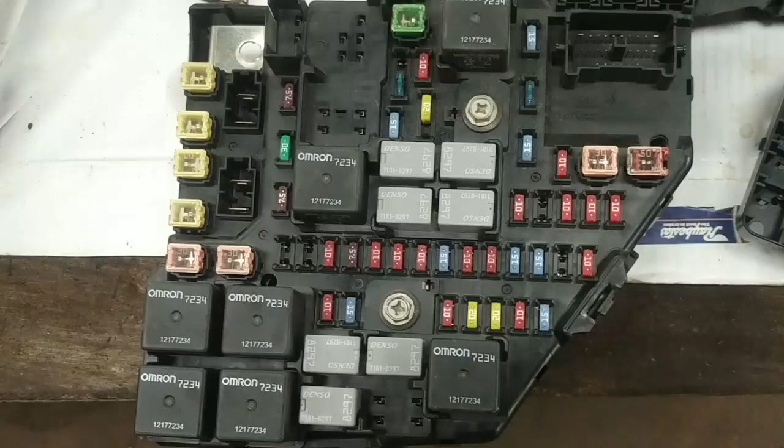So today we've got a previously enjoyed fuse panel out of another vehicle from the States. Looks excellent condition, no signs of corrosion. I've just gone through and compared the fuses on this one to all of the fuses in the original one to make sure they're all in the same place. The only one that was different was this 15 amp, and in this fuse panel, as it's supposed to be 15 amps, it was 10 amps in the other fuse panel for some reason. But everything's there, so we're going to install it in the car.

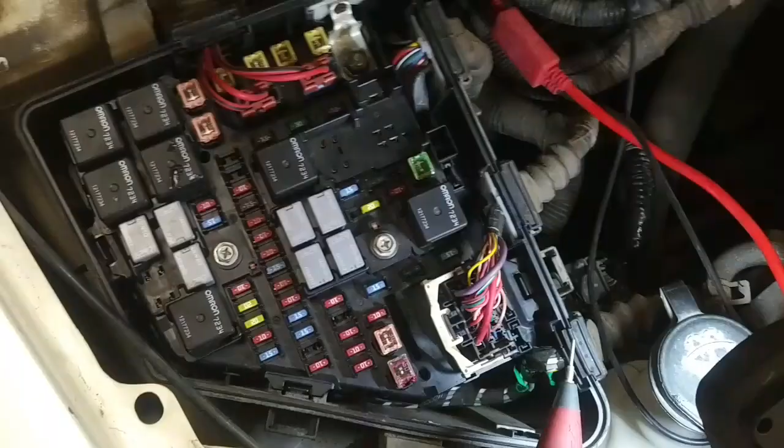Okay, so I got this used fuse panel installed, and everything is connected. I put dielectric grease on all the terminals and reconnected everything. We're still not out of the woods though. The vehicle will still not start. Yet now when I check this fuse that I was checking before, the one that I had a voltage drop on, I'm going to press the load pro button now. No more voltage drop.

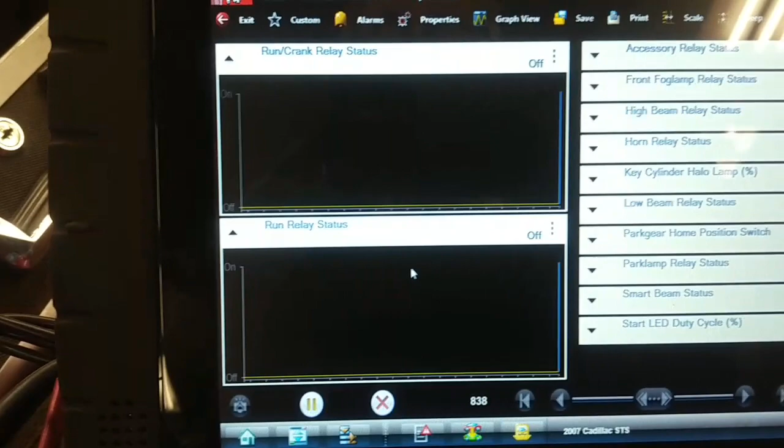So we've corrected part of it, but now the BCM is not turning on this run crank relay, and I'm not sure if it's turning on the ignition 1 relay, which is in the back. So I'm going to have to go back there and have another look at that. It says on the scan tool that it's not commanding it on, yet the ignition switch inputs, there's the run crank relay status off and run relay status off. I'm assuming the run relay is the one that's referred to as the ignition relay in the fuse box under the right rear of the back seat, but I'm not 100% certain on that. Yet if I look at data parameters related to the ignition switch, it seems to be functional. So we're going to do some more checks on that BCM again.

So I'm at the BCM and I just reconfirmed both powers on the red-white wires coming from those two fuses, and I did it with the load pro and loaded the circuits, and there's no voltage drop. Drops 0.1. And I checked the grounds again and they're good. So now I'm focusing on the ignition switch signal into this BCM, which is right here, pin 29, IPM ignition mode data. So I'm back pinning that one.

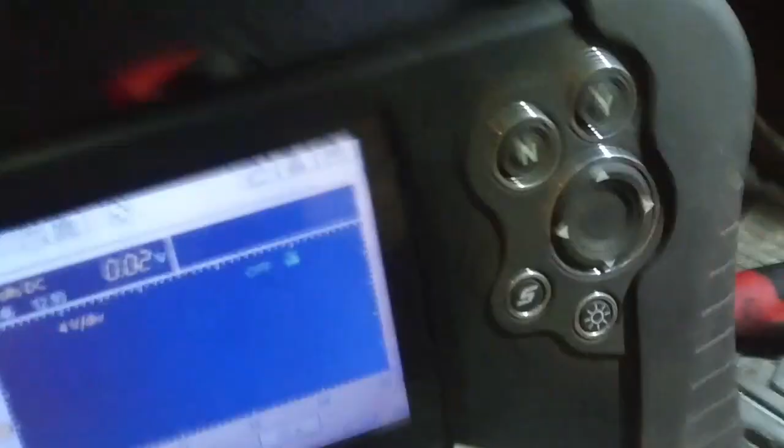It's a green wire with a white tracer, and at rest with the ignition switch in the flashing red mode, whatever that is, it reads 0.02 volts. Oh sorry, the meter shut off. I'm going to press the accessory button here and we'll see what it goes to. 8.93 volts, and the ignition accessories just turned on. Now I have a green start button, which I didn't have. I must have pressed that switch 50 times.

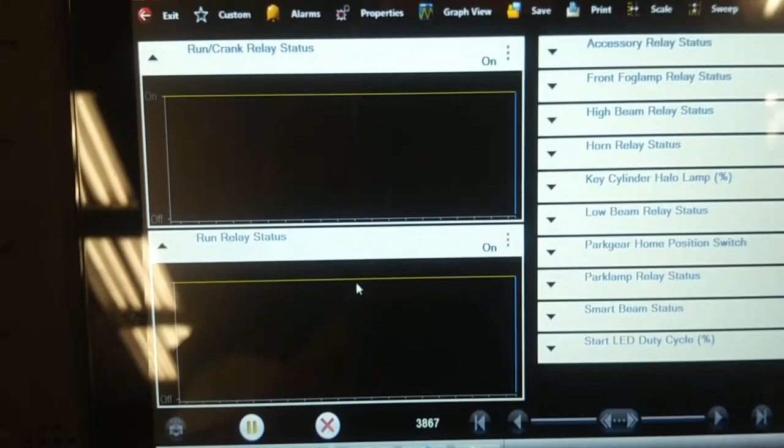The heater fan is running. Ignition switch is on. I'm going to press the start button. Well, I can't press the start button unless I step on the brake, but I think this BCM is acting weird because now it's functional again. While the ignition is on, I'm going to see if I have communication with the PCM. Well, the status of the run crank relay and the run relay both show on now in the BCM data. So let's have a look and see if we can communicate with the PCM. I'm going to go into engine, codes menu, display codes, and there's still no communication.

Back. Let's try the transmission computer. It is a separate computer in this vehicle. The transmission computer is inside the transmission. Let's try transmission. And no communication with that either. So we got to go check those fuses to see if they're powered up again for the engine control and transmission controls.

Okay, so I've got the load pro set up here. I'm going to check this 10 amp fuse that is supplying the PCM. Okay, when I press the load pro button, it doesn't drop anymore like it did before. And this 15 amp fuse, which is another PCM fuse, doesn't drop anymore. So I no longer have voltage drops going to the PCM fuses, but I still got no communication. So we've still got another issue. I don't know if it's a network issue or if it's a BCM issue.

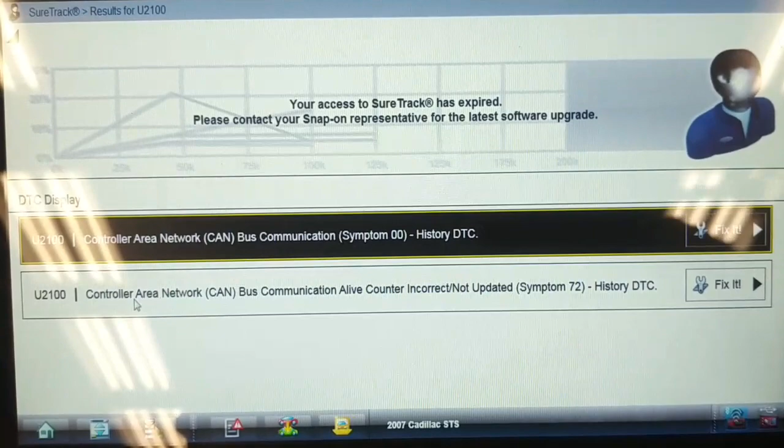So I'm back in the instrument panel module, and I'm going to display codes. I got no communication with the PCM and TCM. And this one says we have a CAN bus communication problem, U2100. Bus communication alive, counter incorrect, not updated, bus communication symptom. Now that could be because the PCM and TCM are offline, or that could be because there's a network problem somewhere. Ay. Guess we got to check voltage drops.

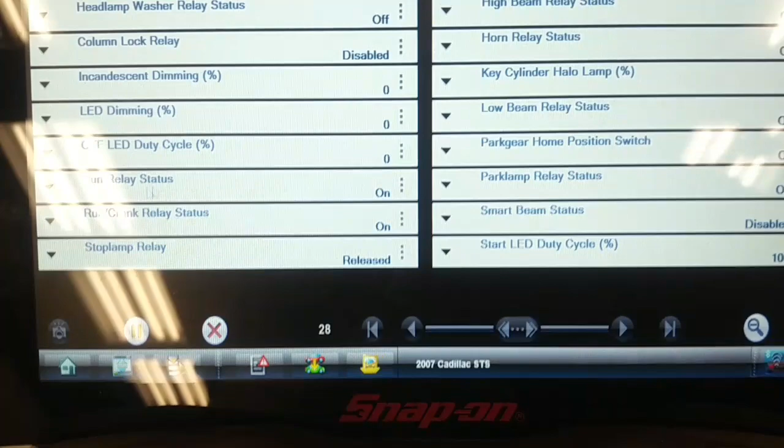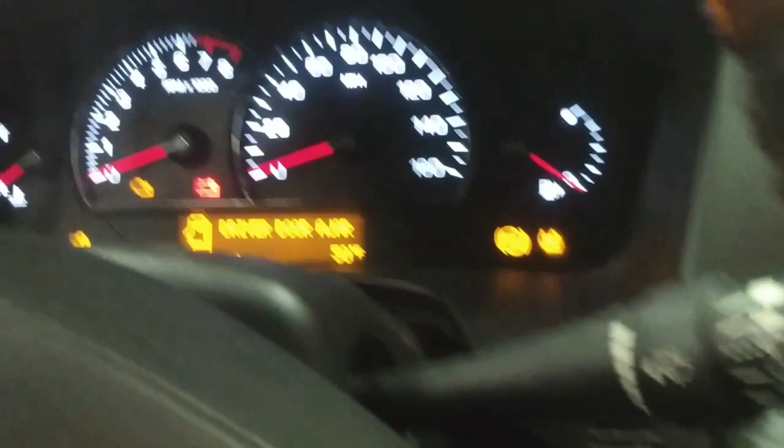What gets me is that if I go into outputs, it shows the run crank relay on. Both these relays are on. I'm going to graph them. And I'm going to go in here. You can see the ignition is on now. Got the ignition on. Got the green start button on here. And I'm going to press that button while I step on the brake. Driver's door is ajar. And everything just shuts right down. Yet I have a voltage input from the ignition switch, and now it won't turn back on again.

Oh, is there a problem with this BCM, or is there a problem with the network? What comes first, the chicken or the egg? I hate this car.

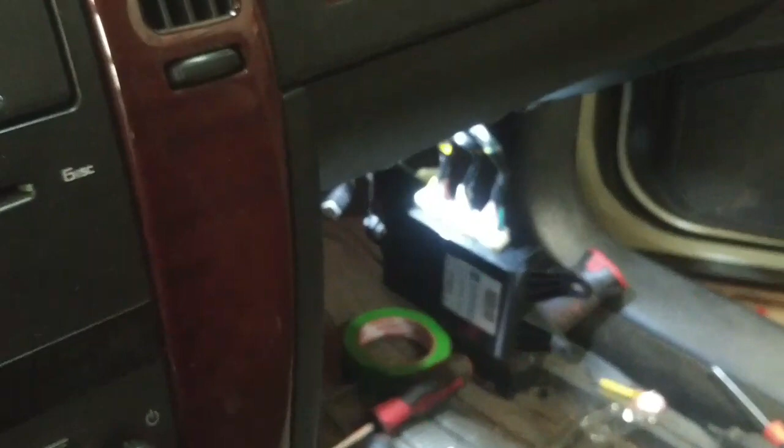Okay, so we're going to have a look at the computers and control systems in this thing and the information bus, try to figure out how this thing is configured. The first diagram here is DLC, power, ground, and instrument panel module, or the BCM. Then it has a list of RPO codes that the vehicle must have. UE1, F55, without F55, K59, TR7, LC3, and UE1 again.

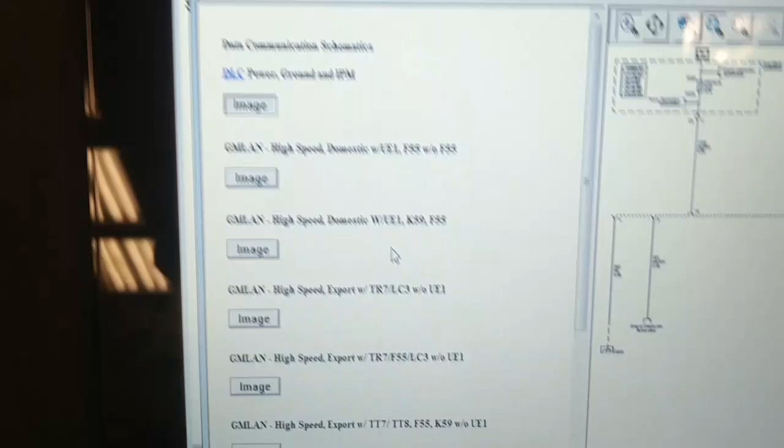Now normally this list of RPO codes would be on the cover of the trunk, or in the trunk on the cover of the spare tire, but I can't get the trunk open. There's no key for the trunk, there's no key cylinder. The trunk release buttons do not work, probably because the network is down, I'm not sure. And I can't go in through the back seat because the trunk is full of stuff.

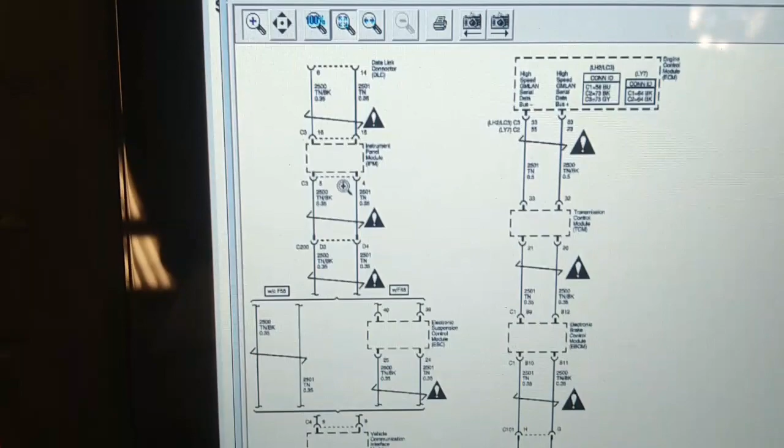So even if we look at this first one, see it goes from pin 6 and 14 at the DLC to the instrument panel module, BCM, and then out of the BCM it goes possibly to electronic suspension control module, vehicle communication interface module, OnStar module. Because I have a Snap-on scanner, it won't talk to that module anyway, so I can't tell if that's online. And then it goes to the electronic brake control module, transmission controller, and ECM.

I know I have no communication with the ECM, transmission controller, and I'm pretty sure I have no communication with the brake controller. These modules I can't access. I'm going to try electronic suspension control, but I don't have the scanner plugged in right now. I'm going to use the Tech 2 scanner because it will tell me which module it's actually polling, and we'll see if that shows any difference.

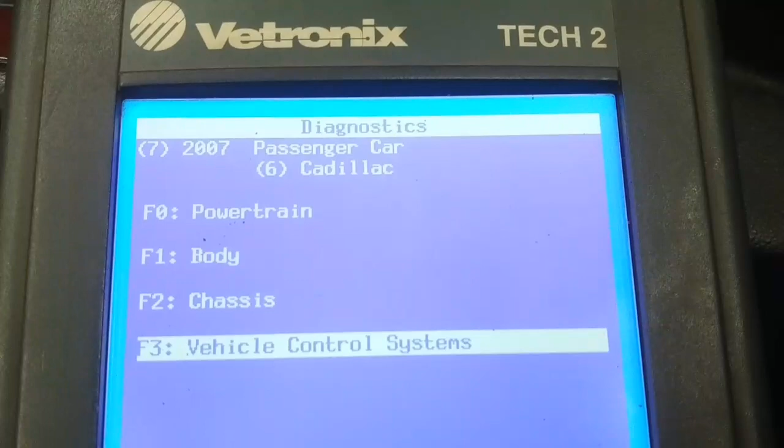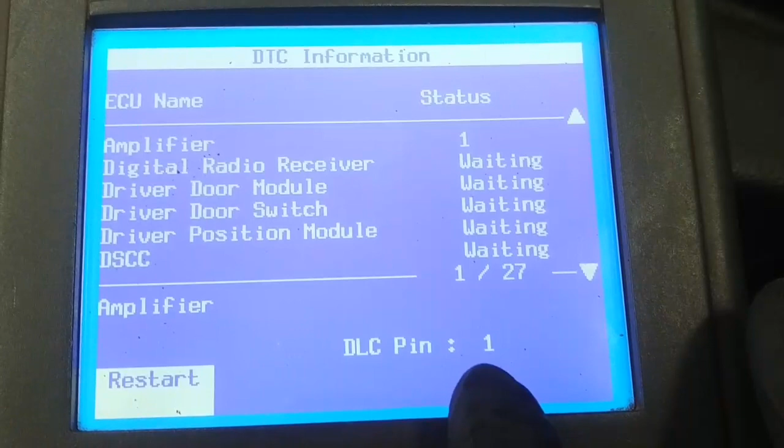So I've got the Tech 2 hooked up to this Caddy. And I'm going to go into vehicle control systems here, and it's a 3.6. And then I'm going to go to vehicle DTC information. This is basically doing a network scan. But if you watch carefully, it tells you which computer it's polling and what pin on the DLC. That's low speed serial data, pin 1.

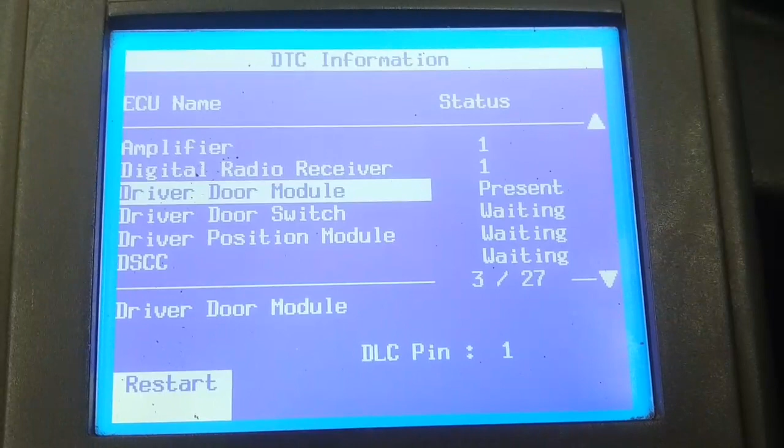So I've got communication with the amplifier, the radio, driver door module, driver's door switch, driver position module. I'm not sure what DSCC is. But I have no communication with that DSCC. Here's the EBCM, electronic brake control module, no communication with it.

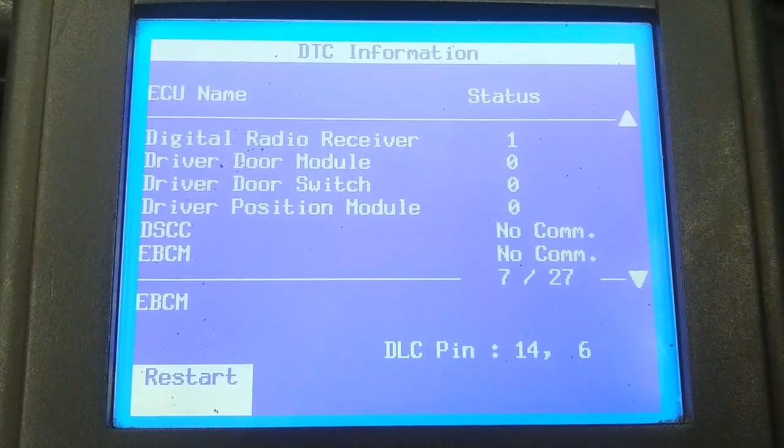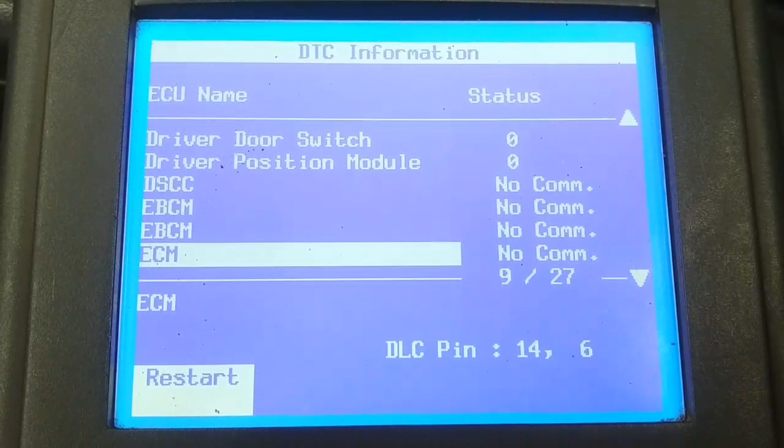I wonder why it's got two EBCMs listed there. No communication with the ECM. Electronic suspension controls. No communication with that. Heads-up display doesn't have one. Even though this is a GM tool, it doesn't differentiate between options that it may or may not have. You would think it would, but it doesn't.

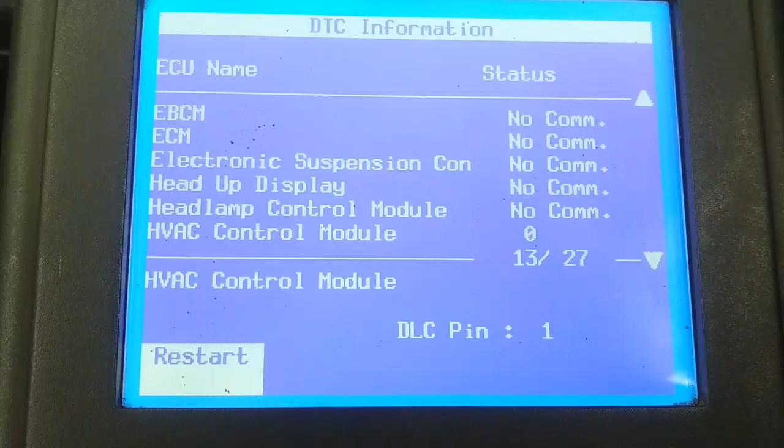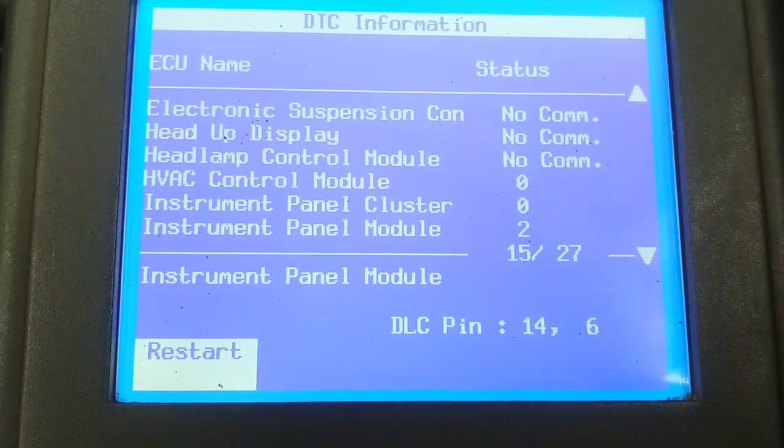HVAC controller, got no codes in that, but I have communication with it. Instrument panel, that's on pin 1. Here's another high-speed network code. Instrument panel module 6 and 14, got codes in it. Left rear door module back to pin 1.

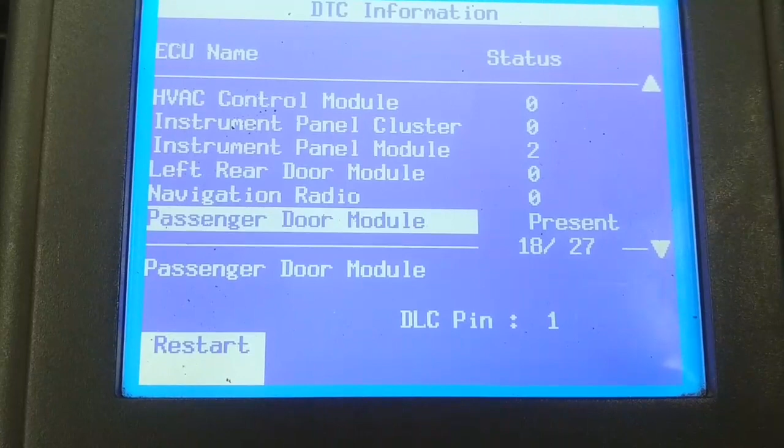Navigation radio, doesn't have a nav radio. Yet it says there's no codes in it. There's a conventional radio. Passenger door module. All the stuff on pin 1 it appears to talk to. Rear integration module. Remote control door lock module.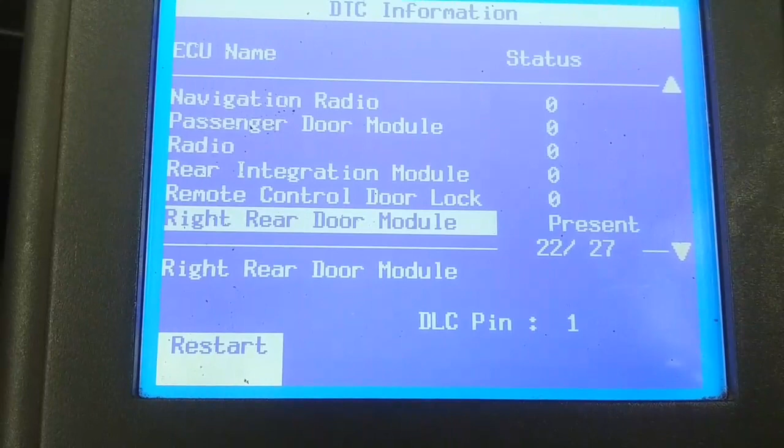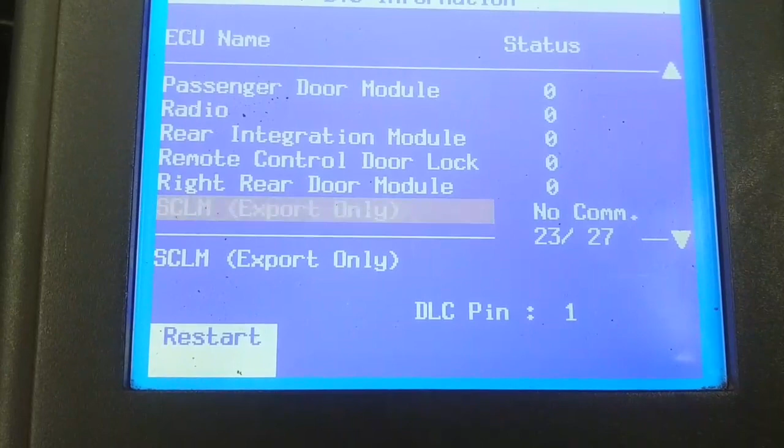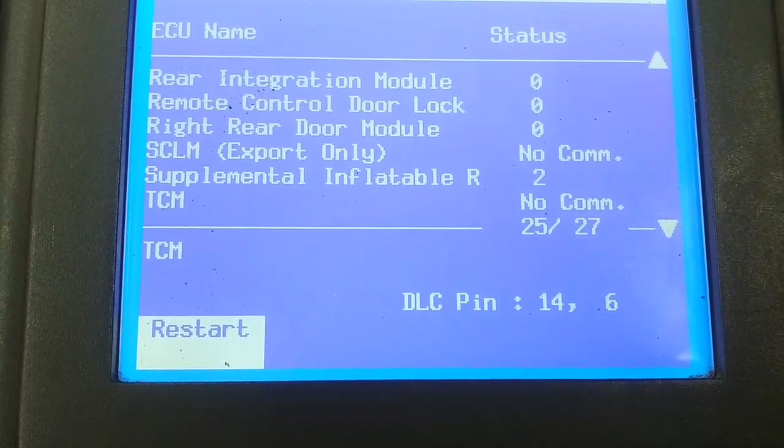So then that's still in 22 modules out of 27. What the heck is SCLM? I'm not sure. Lots of modules on that. Here's a transmission control module, no communication. TV antenna module, I don't believe it has that.

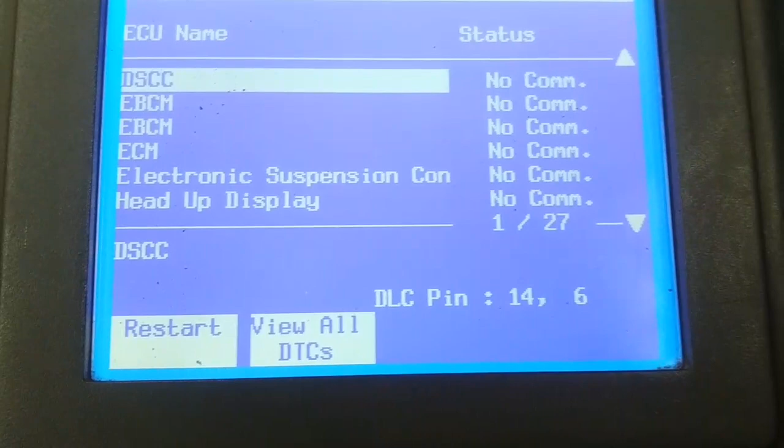Vehicle communication info, that's OnStar. It appears we had communication with OnStar, but the DSCC is no communication. EBCM, ECM, electronic suspension control, heads-up display, doesn't exist. Headlamp control module. We do have communication with the vehicle communication interface module, so that at least eliminates the network from the BCM or the IPM to the VCM.

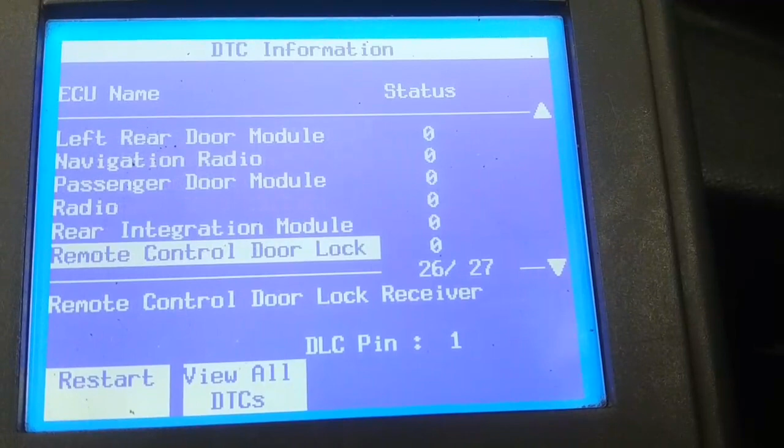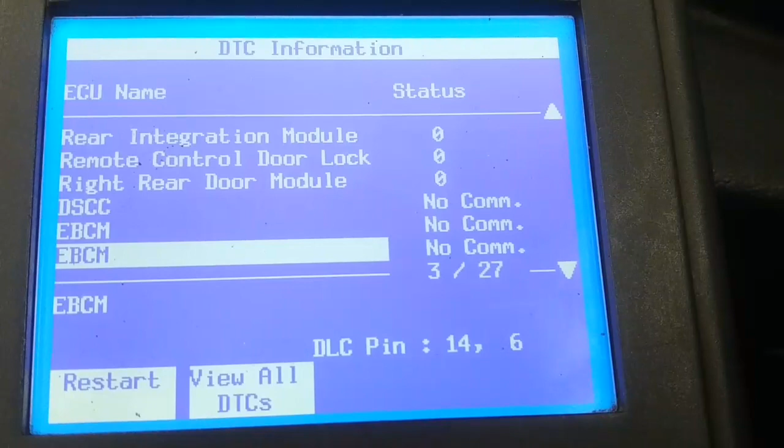B1000 digital radio receiver. See, these are all pin 1 wire or pin 1 connected vehicles, serial data. And we're back to the list of no communication. So we're going to set up the lab scope to have a look at the network, see what the patterns look like.

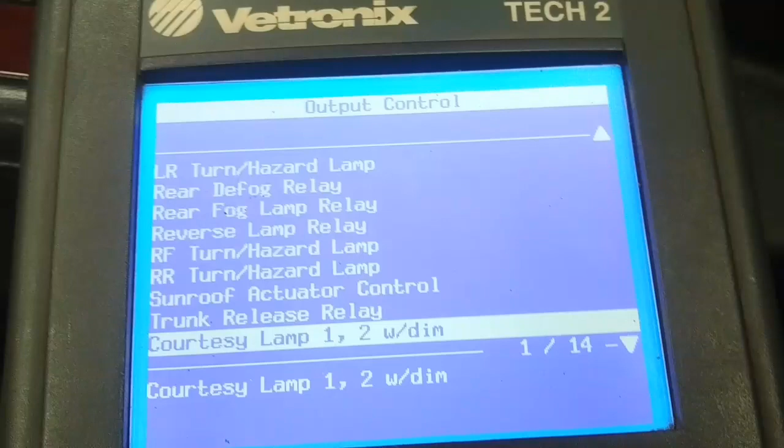So I went into the rear integration module, there was no diagnostic codes, but we do have communication with it. I went into special functions and output controls, and I go down the list here, and there's the trunk release relay. Select that and click on, and it opened the trunk for me. Isn't that beautiful? Why couldn't Snap-on Scanner do that?

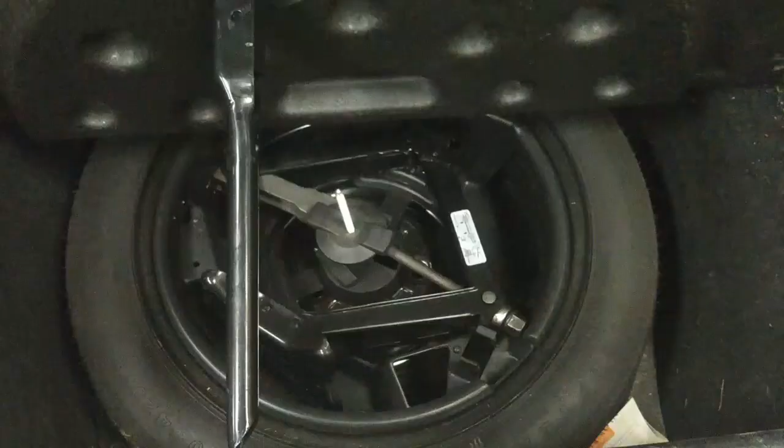Well, this is why I couldn't get in through the back seat. Nevertheless, I'll have to get access to the spare tire cover so I can see what options this thing has. So underneath the trunk cover of the spare tire is the RPO code list that we're looking for, so we can determine what controllers this thing actually has.

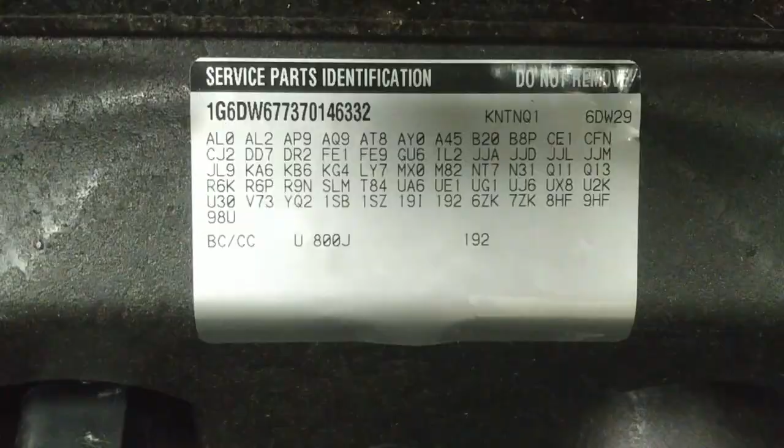So according to the RPO list, the closest match is the first one with the UE1. It does have that one. And then it says F55 without F55. And it doesn't have F55, but it doesn't have any of these other options, K59 and TR7 LC3. So we're going to go with the first diagram here.

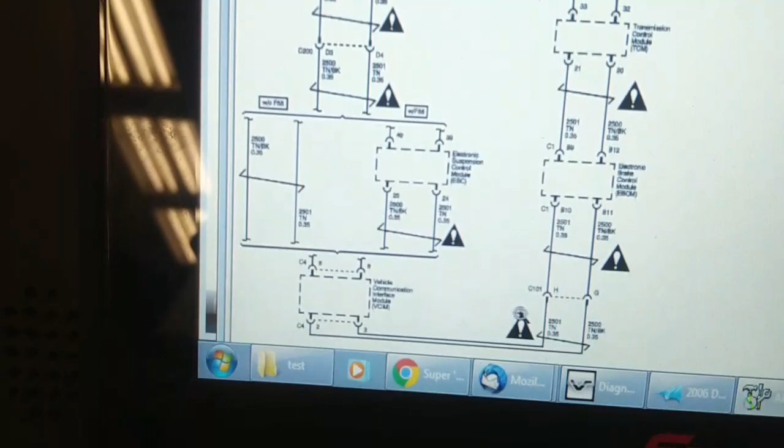So that is the network. And we did have communication. Let's get full screen here. We did have communication with the vehicle communication interface module. So that means the network's good up until that point. There is another connector here, just C101.

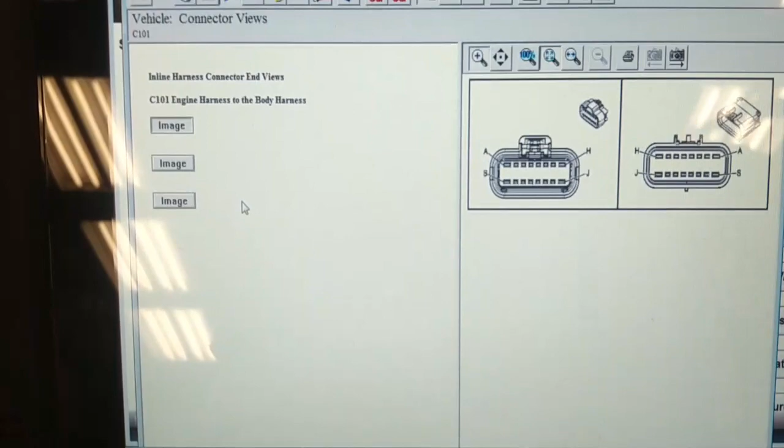C101 under the hood somewhere. Let's have a look at that. So we want to find out where that C101 is. Come on, focus. So we'll go to connectors by number, C101, and it looks like about a 16-pin connector. Yeah, 16 pins. And its terminals G and H are high-speed data on the way to the PCM and the actual transmission controller. Let's see if we can find a connector location.

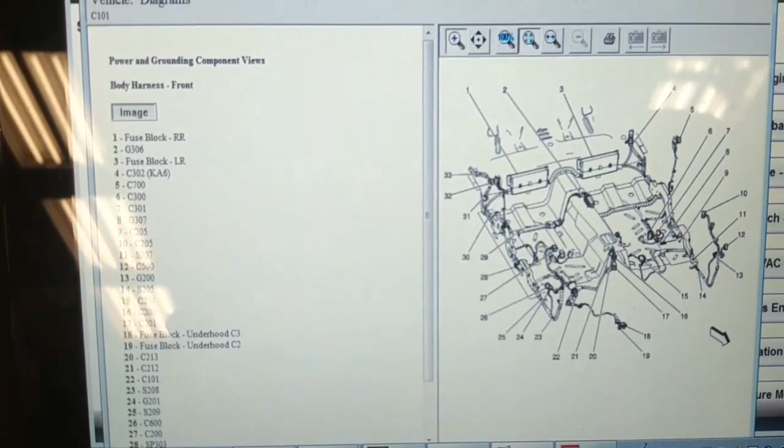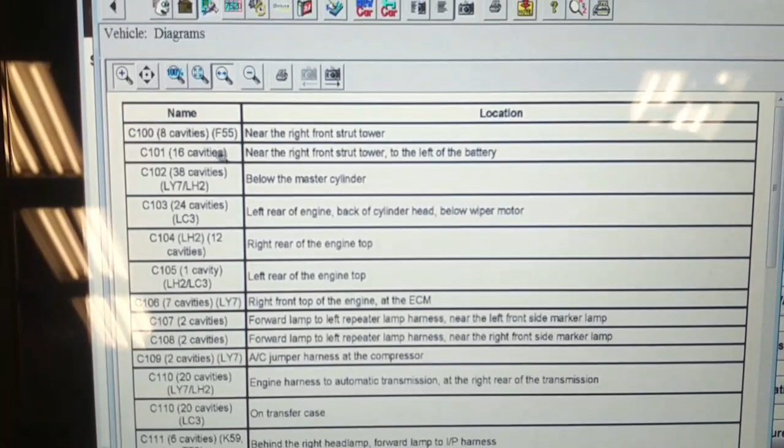Connectors, C101. Well, that brings up the cab area of the vehicle. C101 would be under the hood. So let's try it another way. Let's go to master connector list. Here it is here. 16 cavities near the right front strut tower to the left of the battery. Well, let's go have a look.

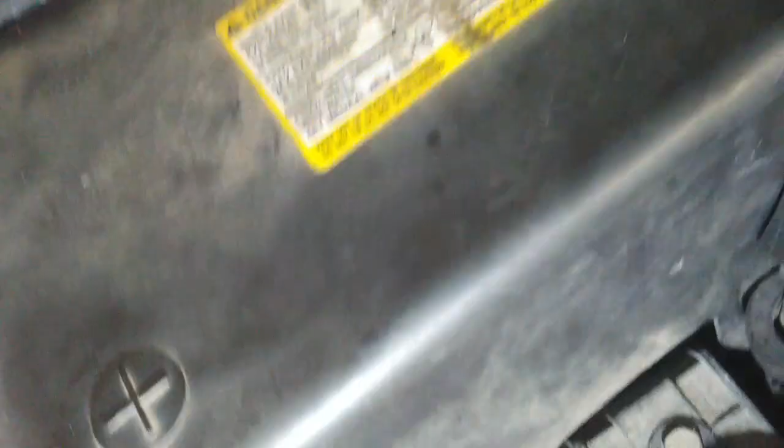Grab my trouble light here. Well, I guess I gotta take this battery tray out of here. Wait a second. Why is that connector unplugged? Are you kidding me? That is C101. Well, let's reconnect it and see how things work now.

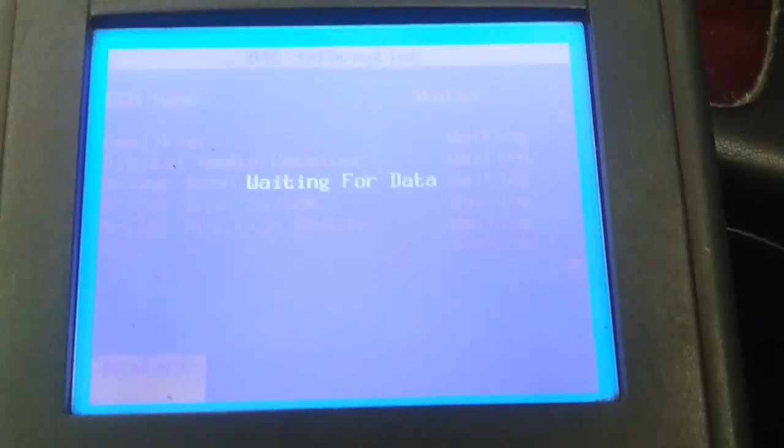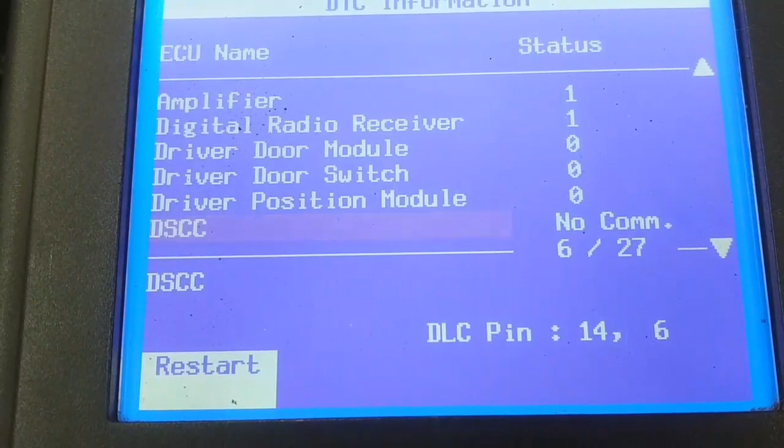Okay, we're going to try rescanning this thing. Vehicle control systems 3.6. DTC information. And we're going to go through the controllers again. It says accessory active on the dash now. EBCM is present now, yay! And it has 8 codes, imagine that.

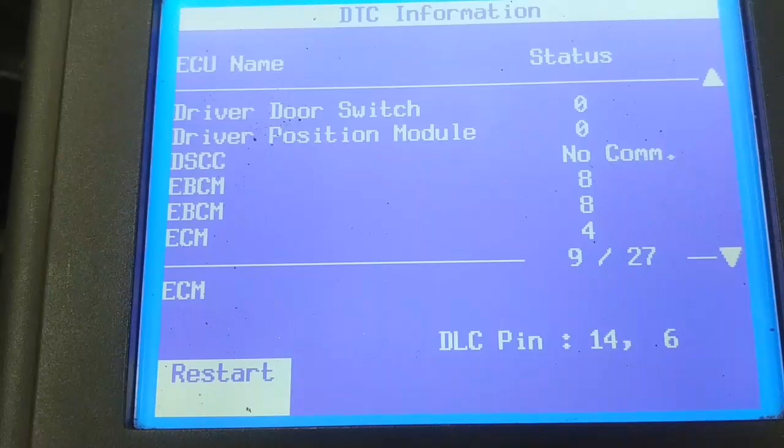I don't know why there's 2 EBCMs listed on this scanner when it scans a network. ECM is present now. 4 codes in it. Suspension control it doesn't have, I don't believe. That's one of those RPO codes. Heads up display it doesn't have. So I don't know why that C101 connector was unplugged. I think the customer must have done that when he was swapping the battery and didn't realize that he forgot to plug it back in.

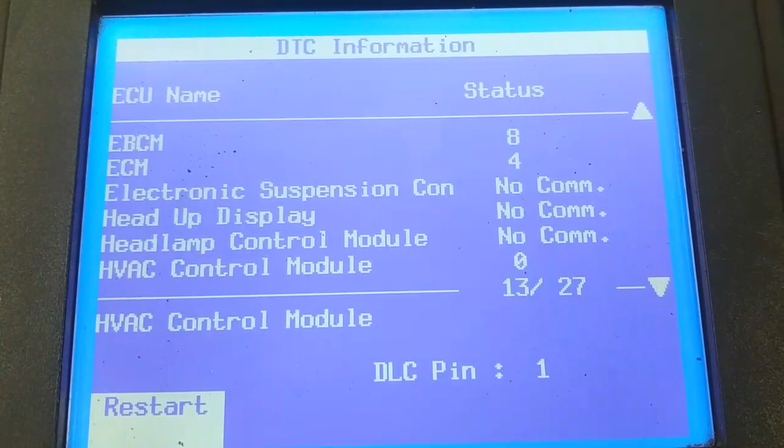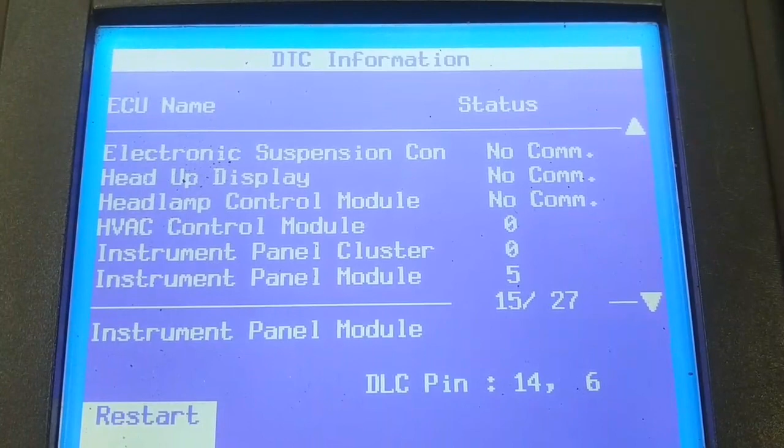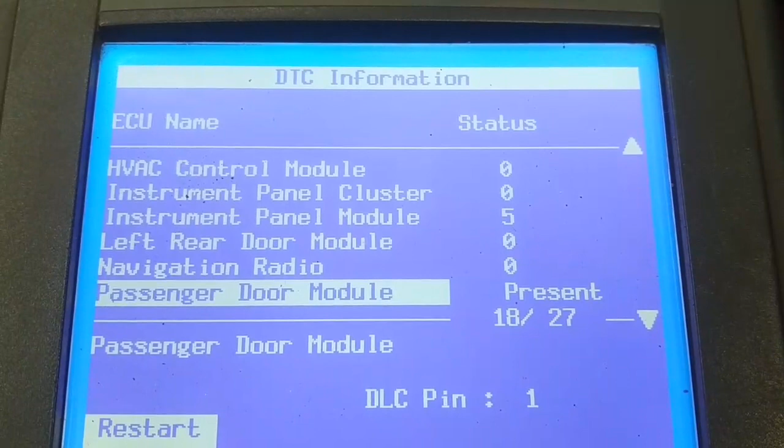What other module was on the high-speed network? We had communication before between the instrument panel cluster, left rear door module. We had all of those. Out of 27. Forgot to hook the battery charger back up to this thing. 19. Rear integration module. Remote control door lock module.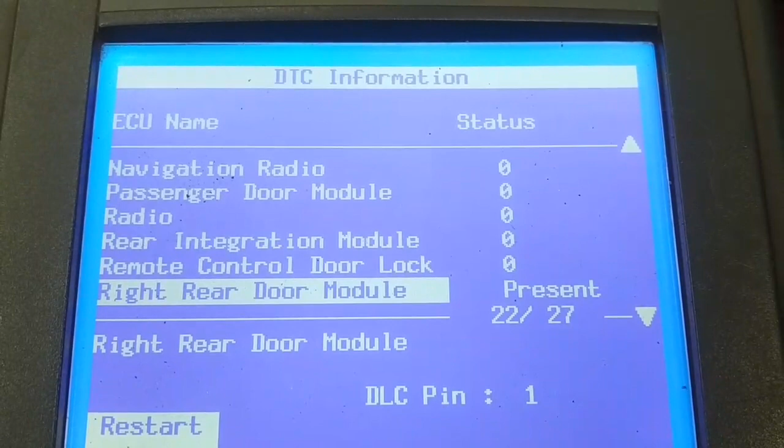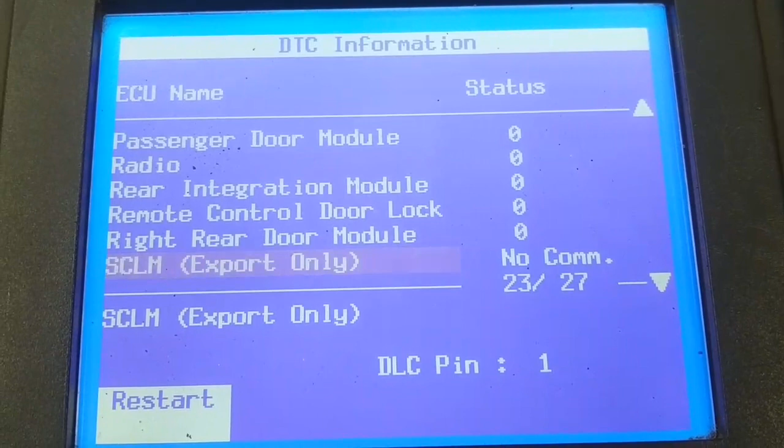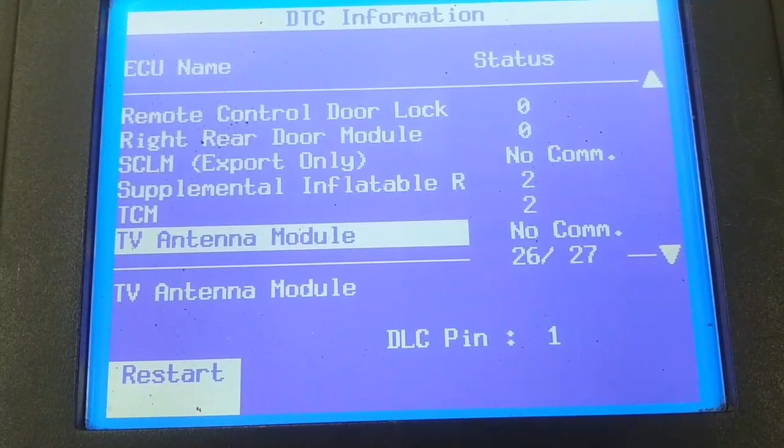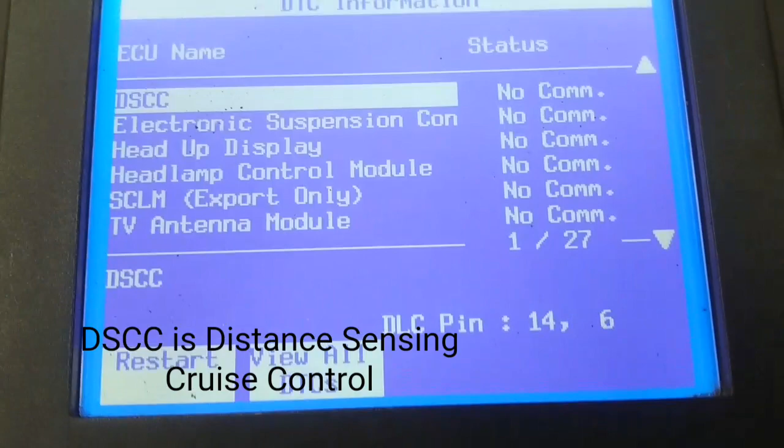Codes in the airbag system. Transmission control module. It's present now, yay. TV antenna it doesn't have. And last but not least, OnStar. So we have no communication with the DSCC, whatever that is. We'll have to find out. And the other modules don't exist on the network, but we do have these guys. View all DTCs.

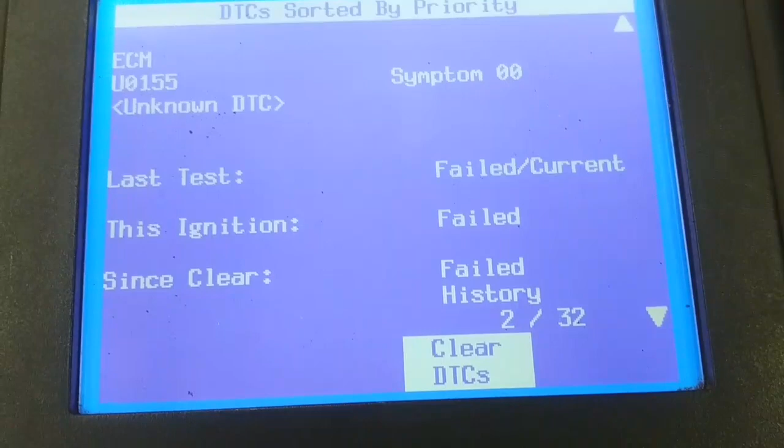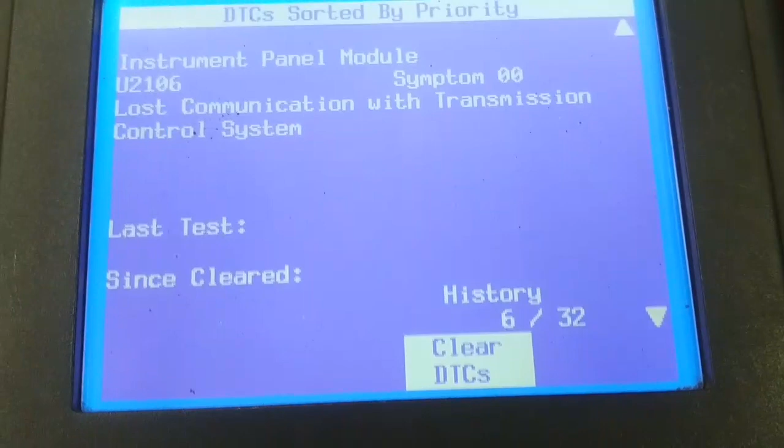P0575. Doesn't even tell you what the codes are. U1000, U0155. All kinds of network codes. Fuel pump relay control circuit open. Electronic control unit performance. Lost communication with transmission controller. Lost communication with engine controller. CAN bus problems. There are a whole bunch of codes in here. So we're going to clear out all the codes.

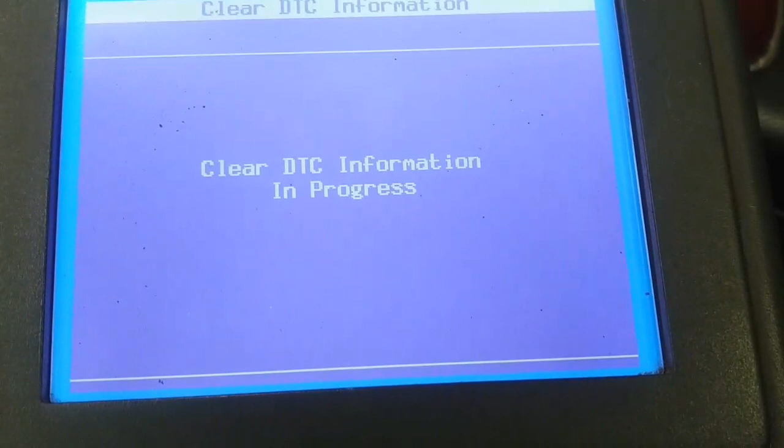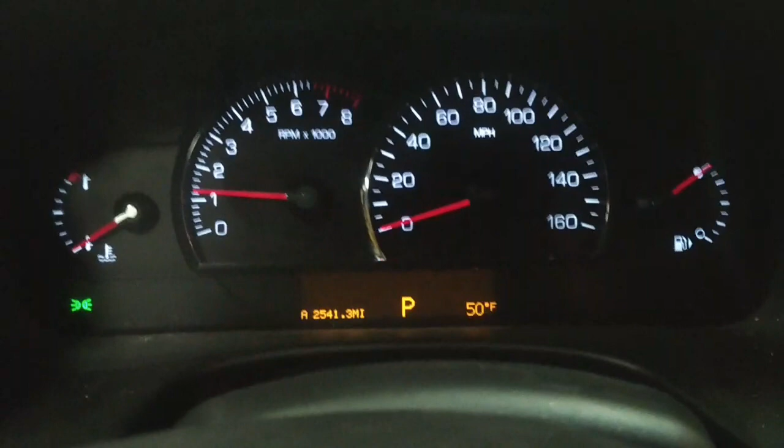And yes, let it clear out all the codes. While it's doing this, because this is going to take a couple minutes, I'm going to reconnect the battery charger. Well, so it runs again. Imagine that when you reconnect the network wiring and you have communication between the BCM and the PCM. So I guess I don't need to do a network test. I was going to do it at C101, but I found it unplugged and reconnected it. The car doesn't run very well. It needs a little bit of TLC.

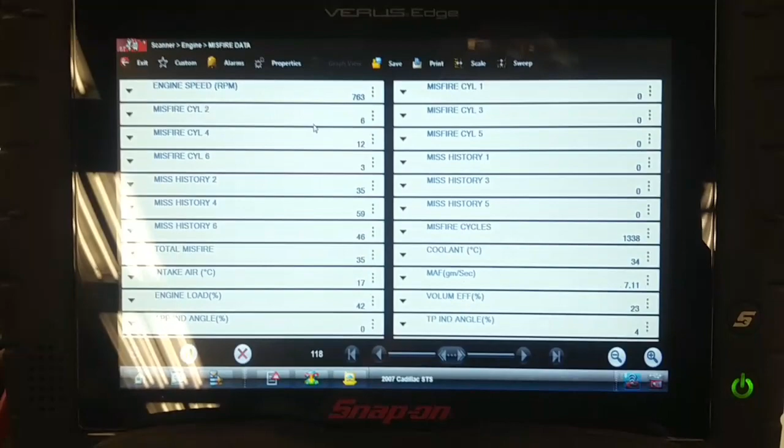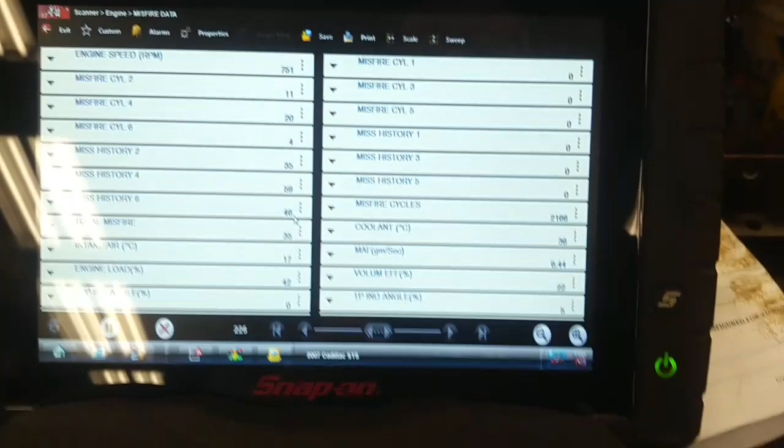So the car is running, but it's missing like crazy on several cylinders. I'm not sure why. Cylinders 2, 4, 6. Now these are history codes. Well, we'll put this car back together again and we'll address the misfire problems.

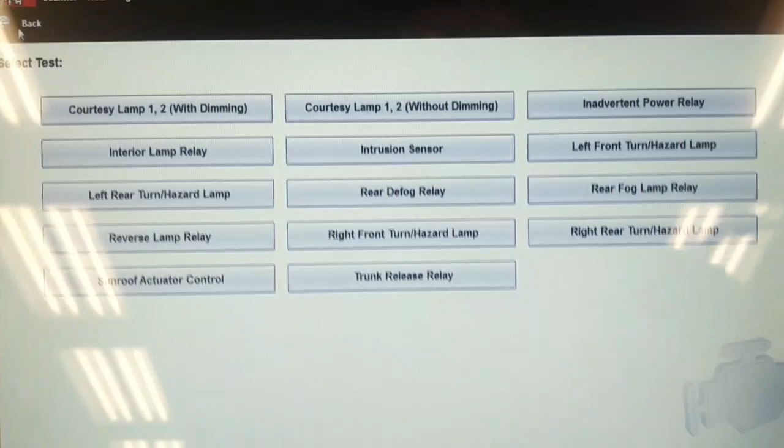So I eat my words. I went into the rear integration module in the Snap-on scan tool and output controls, and there's the trunk release. And as you can hear, it responds. So I could have opened it with the Snap-on scan tool. I just didn't know which module it was in. I assumed it would be BCM, but I guess the BCM speaks across the network to the rear integration module. Put this car back together now, and then we'll address the running problems.

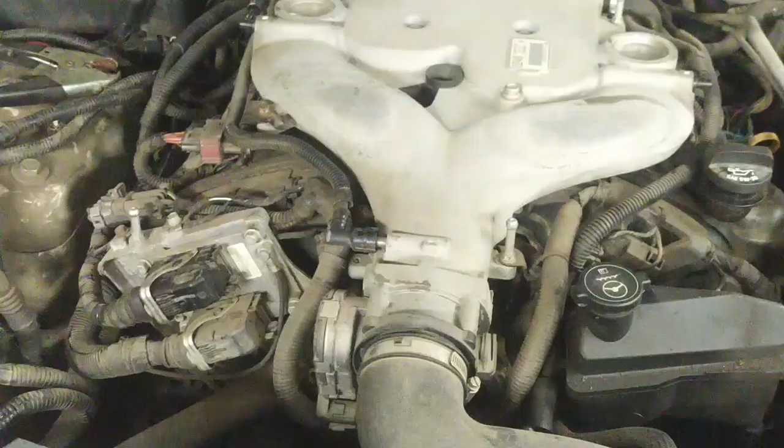So the car's back together and running. Not running very well, I might add. It's obviously missing. And I got the scanner on it. We're looking at some data parameters, and I reviewed codes. I had cleared all the codes, and this is what came back. P0300, 302, 304, 306, so that's all on one bank. And then P0017, exhaust camshaft position correlation bank 1.

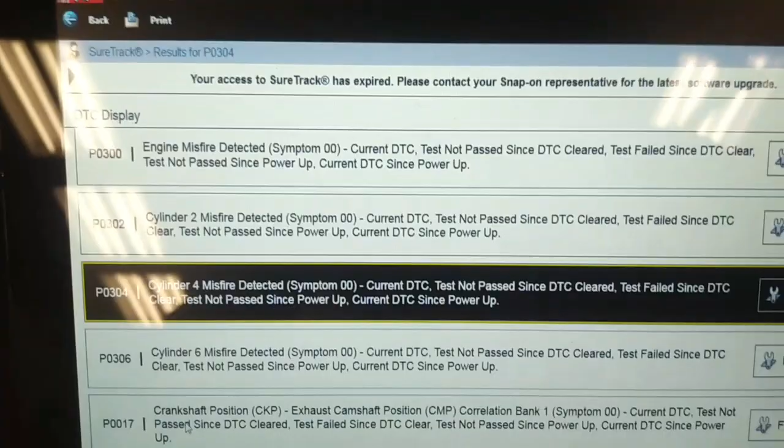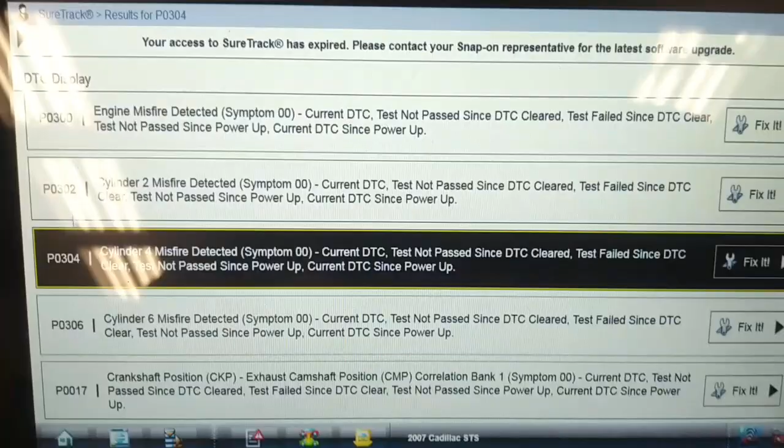I wonder if it's got a cam phaser that's sticking, probably due to lack of servicing. I noticed the oil change required light on. So if this exhaust camshaft position correlation bank 1 is related to the same cylinders on that side, I would expect that it probably needs an oil change. Maybe this cam phaser stuck. We'll have a look and see what side bank 1 is.